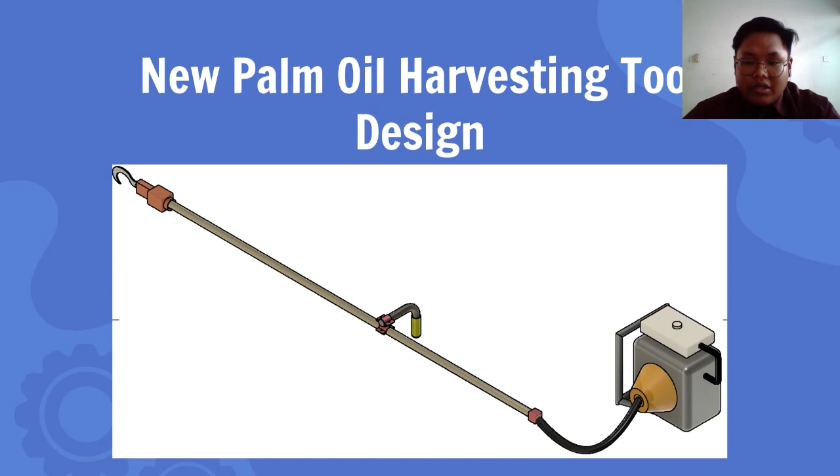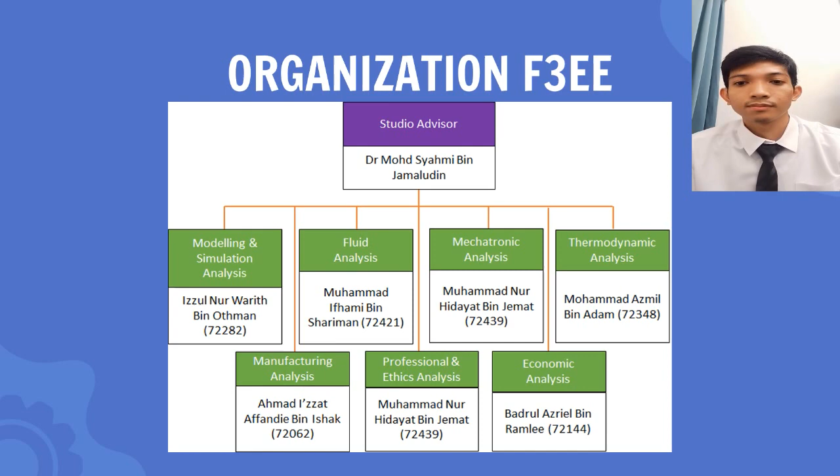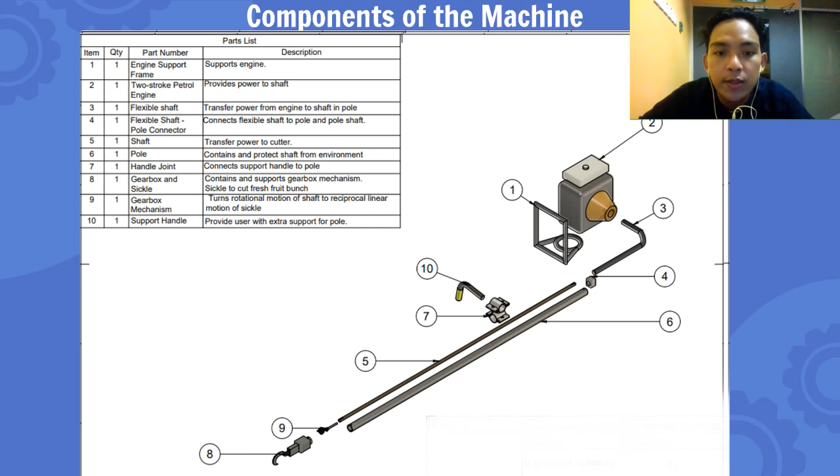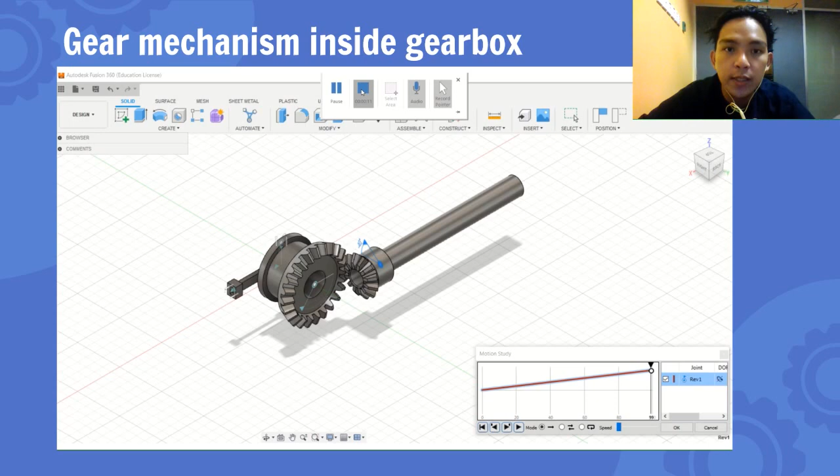Next is the gear mechanism inside the gearbox. The sickle moves with a 10 mm linear motion to cut the fresh fruit bunch, so the rotational motion of the shaft needs to be converted into linear motion. The shaft is connected inside the gear train to a bevel gear, which is also connected to a Scotch yoke mechanism. That way, the rotational motion can be converted into linear motion, so the sickle will move linearly.

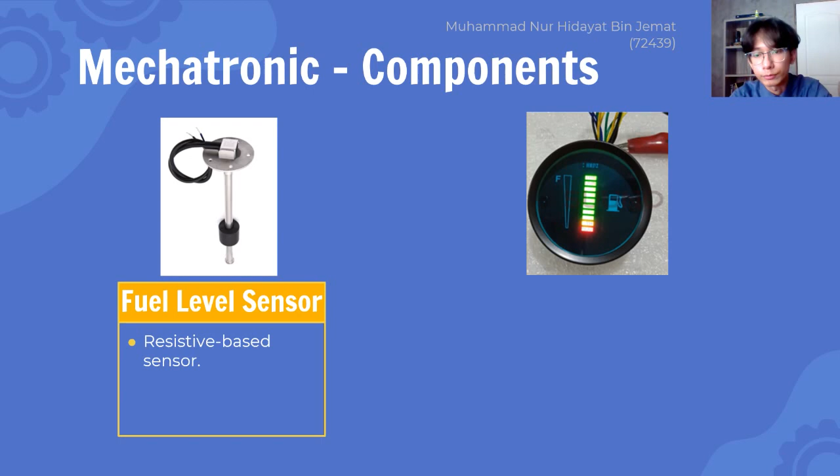Next is the mechatronic components of our machine. We will use a fuel level sensor system to indicate to the user how much fuel is left for the engine. This is because the fuel tank is located on the engine at the back of the user during operation, so it is difficult for the user to see the fuel level since it is out of their sight. The implementation of this system will help solve this problem, so the user knows how much fuel is left in the tank before it finishes.

The suitable sensor for this system is a resistive base sensor. This sensor is small and can be placed in the tank of our engine, used to measure the fuel level inside the fuel tank. The next component is the digital fuel gauge, which indicates the fuel level measurement from the sensor to the user.

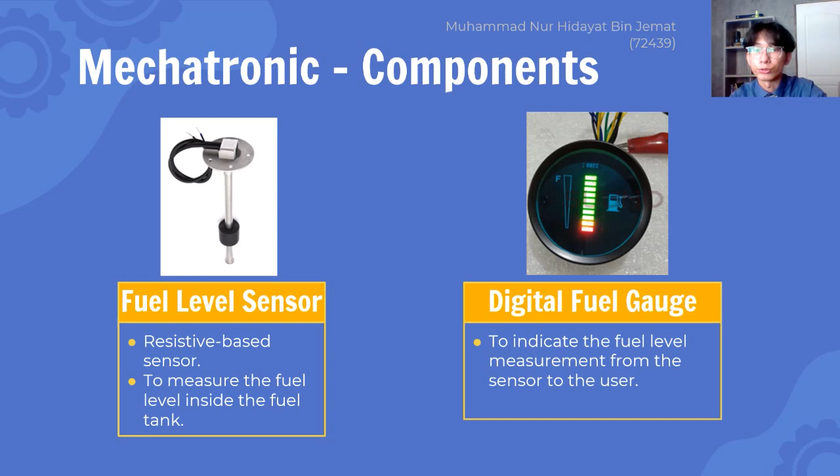Next are the components used to connect the digital gauge onto the pole. A V-shaped bracket is used to hold the digital fuel gauge to a fork clamp, and this fork clamp is used to mount and hold the V-shaped bracket with the digital gauge on the pole.

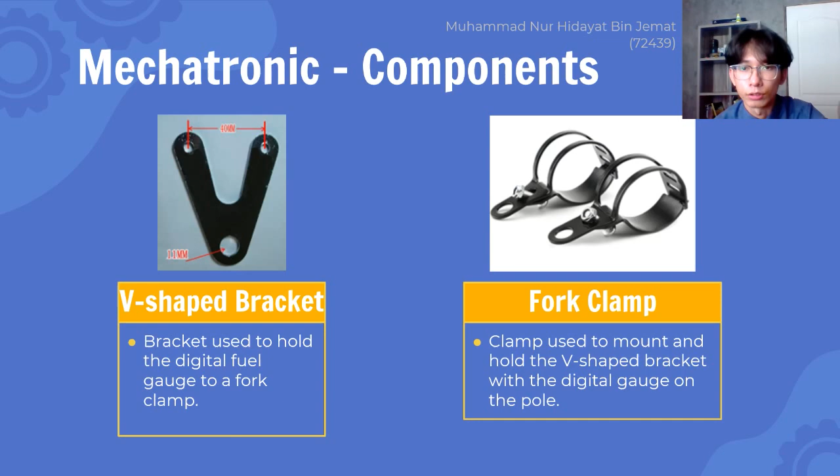This fuel sensor acts like a potentiometer, and the float moves with respect to the fuel level. As the float moves, the resistance of this fuel sensor changes.

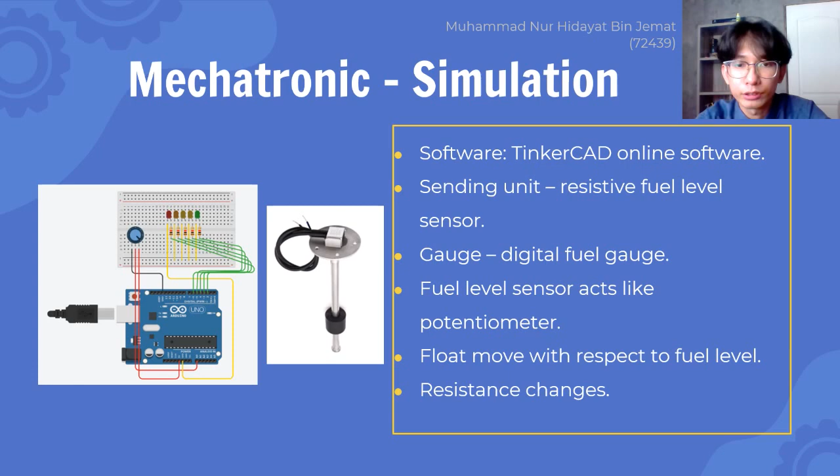When the float moves upward, the resistance of the potentiometer will decrease and the amount of voltage will increase, lighting up the LEDs inside the digital gauge.

Simulation circuit for our fuel level system. In this circuit, Arduino Uno R3 is used as the microcontroller, and a potentiometer in the circuit is used to measure the fuel level in the tank.

The LEDs with different colors are used to indicate the fuel level in the tank. The red LED indicates that the fuel is almost empty, the yellow LED indicates that the fuel is half full, while the green LED indicates that the fuel is full in the tank.

So in this simulation, as I rotate this potentiometer anti-clockwise, the resistance level will decrease and the voltage will increase.

This increasing value of voltage lights up all the LEDs, indicating that the fuel level is full. And it works vice versa as I rotate the potentiometer in a clockwise direction.

The engine that we will use for our machine is a two-cycle single-cylinder forced air-cooled gasoline engine. The model is

SM33 Sumo brush cutter. The capacity for this engine is 30.5 cc, while the output is 0.81 kilowatt or 6,500 rpm.

The ignition plug used for this engine is BM6A. The capacity for this tank is 1.4 liter, and the weight for this engine is 3.8 kg.

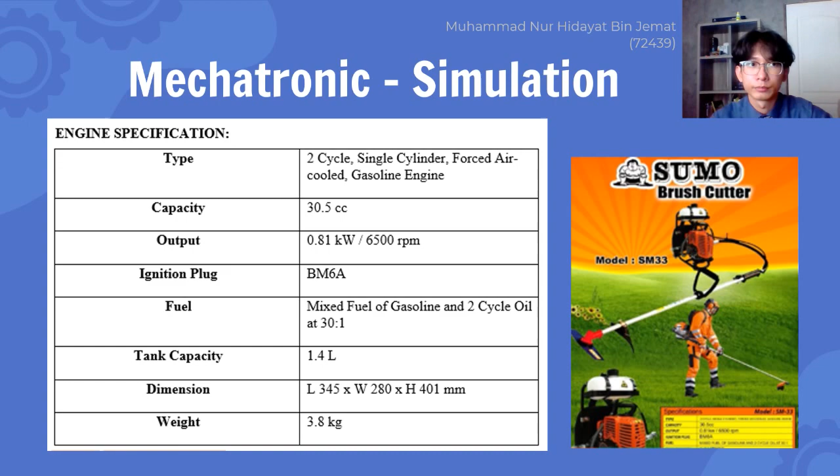The next part is the production rate of the product. Our company's annual production is 960 units of the harvesting tool produced per year.

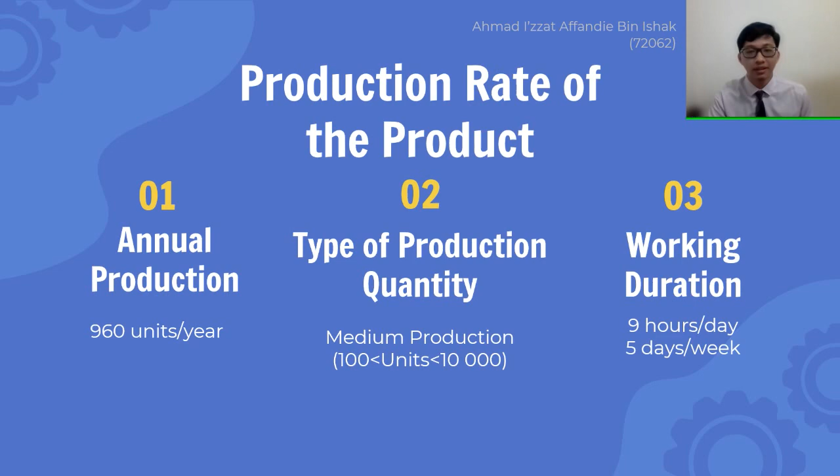The production rate can be classified as a medium production quantity as it is more than 100... and not more than 10,000 units per year. The working duration is 9 hours per day and 5 days per week.

The components and parts used in our product. The handle joint is the only component of the harvesting tool that is actually fabricated by us through the sand casting manufacturing process, which is from aluminum alloy.

6061 T6. Our company does not fabricate the components except only the handle joint, since doing so would be expensive and costly. Instead, all the components and parts are outsourced, meaning they are purchased from third-party vendors.

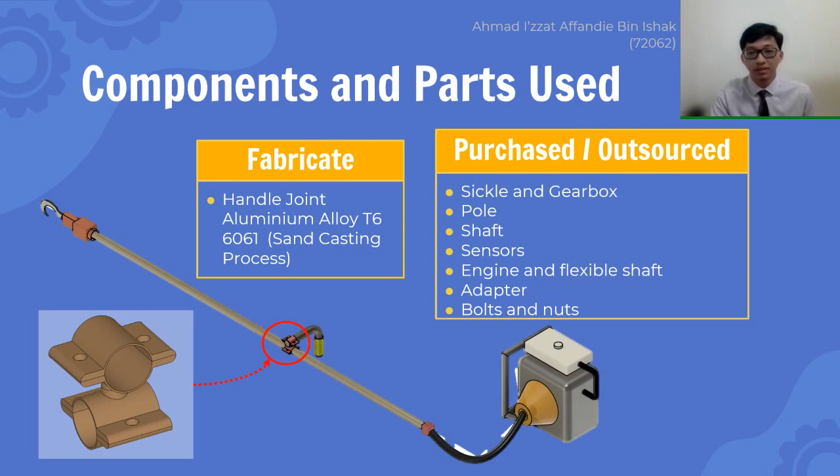The parts that we outsource are such as the sickle and gearbox, pole, shaft, sensors, engine and flexible shaft, adapter, and bolts and nuts.

The fabrication of the handle joint. The figure shows the flow of the fabrication process.

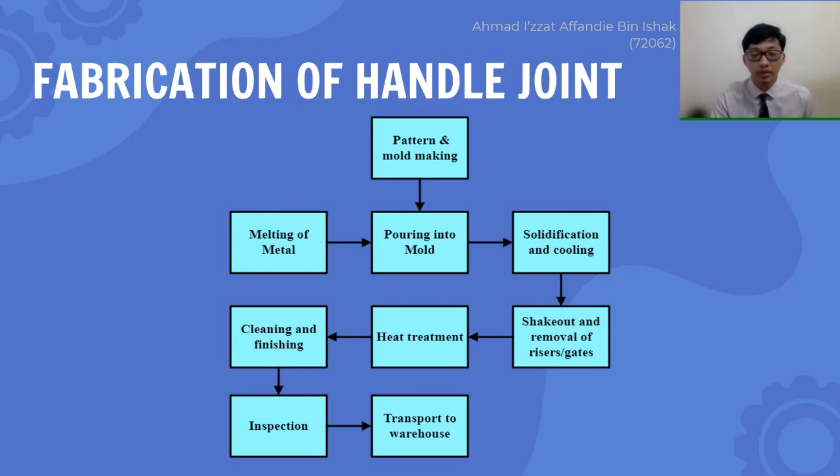First, in the initial phase of casting the handle joint, the metal of the handle joint, which is aluminum alloy T6 6061, is melted in the furnace.

Next, an imprint was formed by laying the design in the sand and pressing it to create the shape of the component that will be cast.

The design is then removed, and the cavity of the mold is then filled with the molten metal. The metal is then allowed to cool until it becomes solid.

Then the casting is extracted from the sand mold, which will be broken away from the sand mold. After that, the process of heat treatment is done to strengthen the material, and then it will undergo the cleaning...

...and finishing process. Before the handle joint is transferred to the storage facility, it is inspected to determine its quality or any possible defect that may occur.

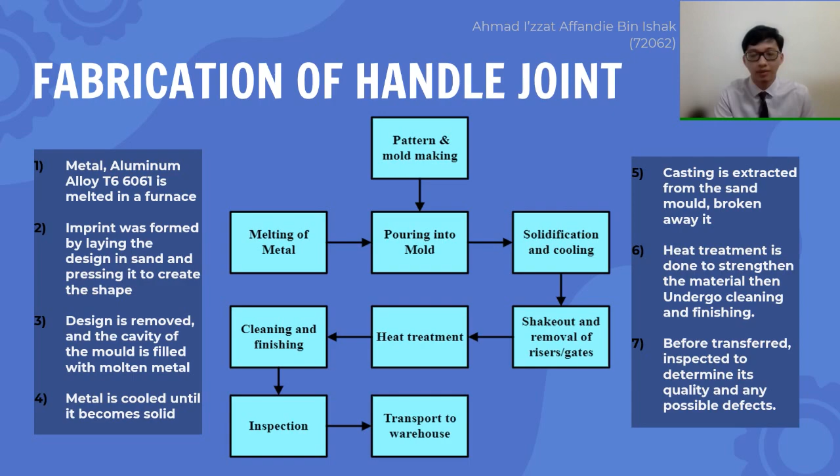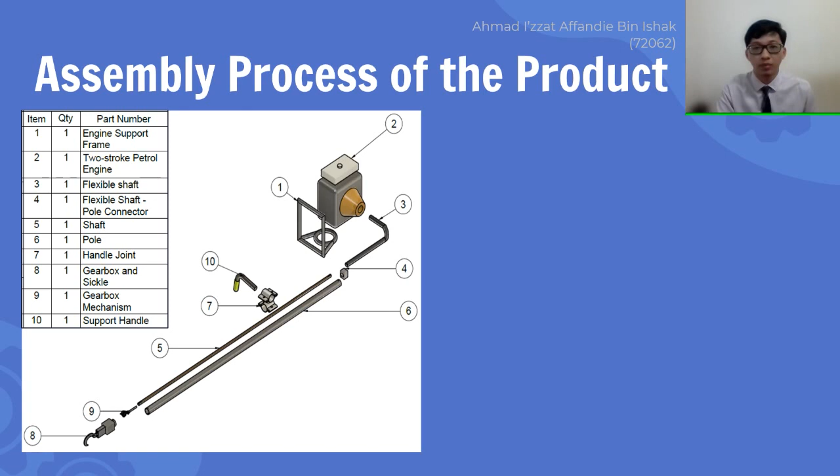Process of the product. There are three main parts that need to be assembled before fully completing the final product. The first part is from the bottom, consisting of engine, frame, flexible shaft, and pole connector.

Then the second part is at the middle. This part consists of shaft, pole, handle joint, and support handle.

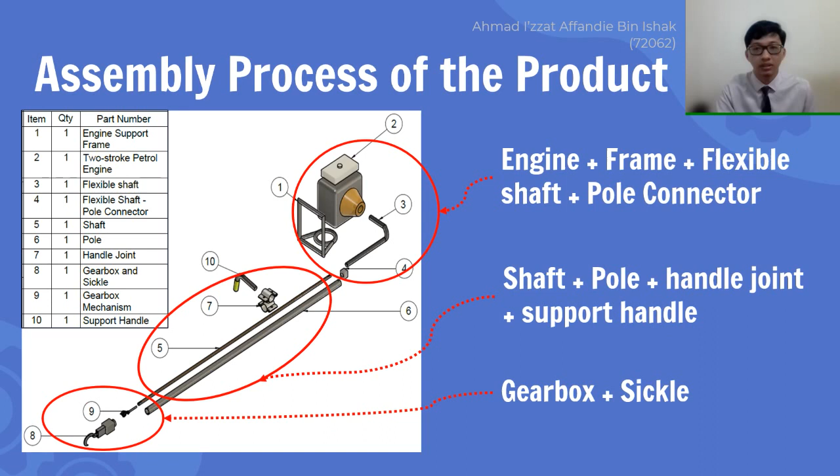And the last part is at the top. In this part, it consists of gearbox and sickle. After completing the assembly of these three parts, the user can then assemble all the parts together before it can be used.

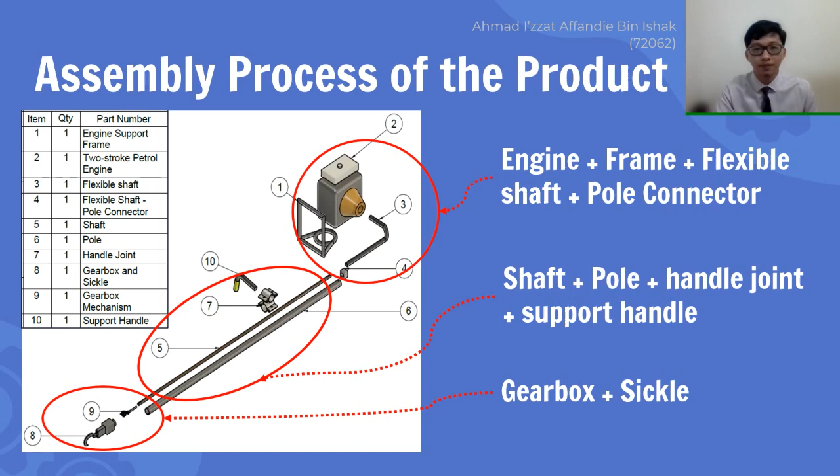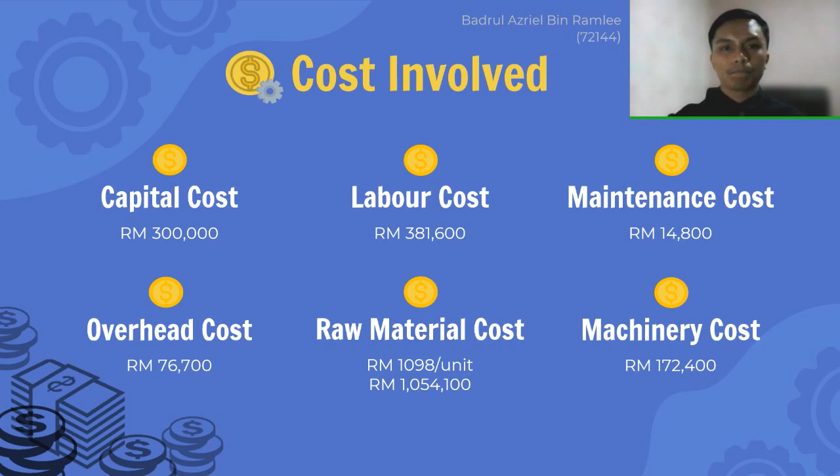As for our initial investment for the project, the total investment required for the project to be initiated is around 2 million. This investment considered the capital cost, labor cost, operating cost, and the raw material cost.

From the calculation of unit selling price, considering 10% SST rate and 40% profit from sales, the selling price for our machine was 2,426 ringgit, which is significantly cheaper than the Cantas import price mentioned in a journal by MPOB, costing around 3,800 ringgit. This unit selling price is also slightly cheaper than some existing Cantas Evo in the market, which range from 2,600 to 3,400 ringgit.

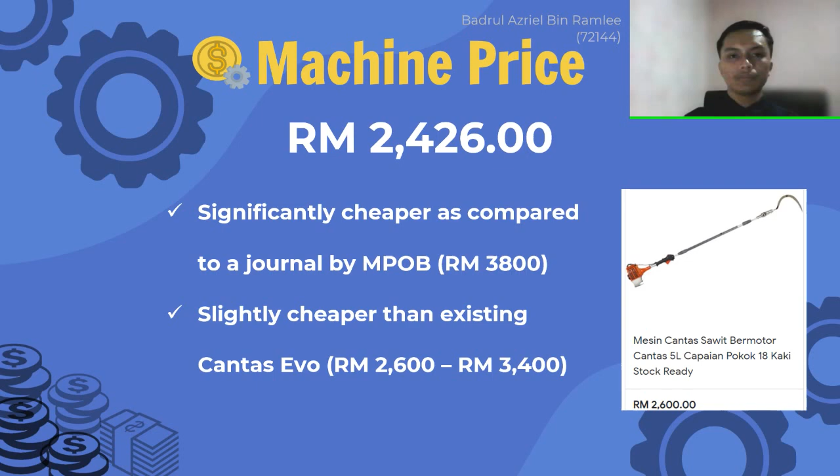Last but not least, the benefit cost ratio calculated from the cost analysis was 1.54, which shows that the project will bring benefits instead of losses. Apart from that, the yearly sales of the machine will also help us regain the investment about 41% annually. This means we will gain back the full amount of our investment in only 3 years.

Finally, from the break-even analysis, our company needs to successfully sell around 367 units of our product in order to overcome the cost to produce the machine and start gaining profit. From this quantity, the revenue of the break-even analysis is about 890,000 ringgit.

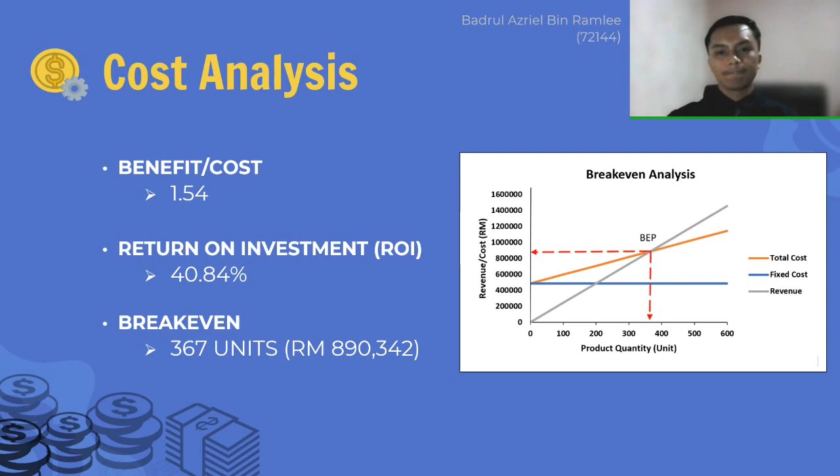Finally, to conclude, the costing part for our project will assist in achieving the Sustainable Development Goals. The targeted SDG goals from our project will be SDG 8, 12, and 13, which promote sustainable economic growth, sustainable consumption and production, and help combat climate change.

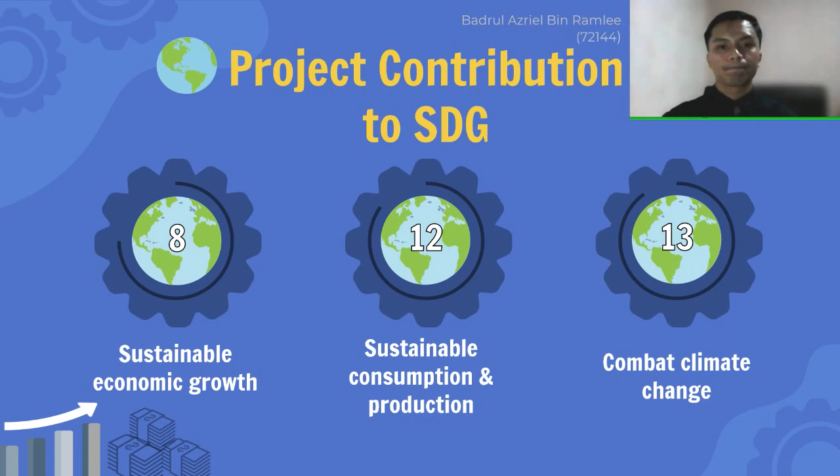Next part will be professional and ethics. For our machine, during operation, it will produce vibration and noise. These vibrations are produced by the engine, which can be transmitted from the machine to the hand of the user. It can cause discomfort and decrease the efficiency of the harvesting process. When the level is higher, it can lead to serious problems such as disease. Thus, we have decided to follow a standard such as the international standard ISO 5349.

According to this standard, the vibration exposure level should be lower than 2.5 meter per second squared. If the level is higher than this, changes need to be made to modify the vibration so that it is lower than this value. To measure the vibration, an accelerometer can be used by measuring the vibration at the holding points on the pole.

This vibration can be reduced by using an isolator. As for the noise, exposure during work can lead to hearing damage, especially if exposed for a long period of time.

This is the standard that we will use for noise exposure, set by the Occupational Safety and Health Noise Exposure Regulations 2019. According to this standard, the limit for daily exposure should be less than 85 decibel, the maximum sound pressure level should be less than 115 decibel, and the peak sound pressure should be lower than 140 decibel.